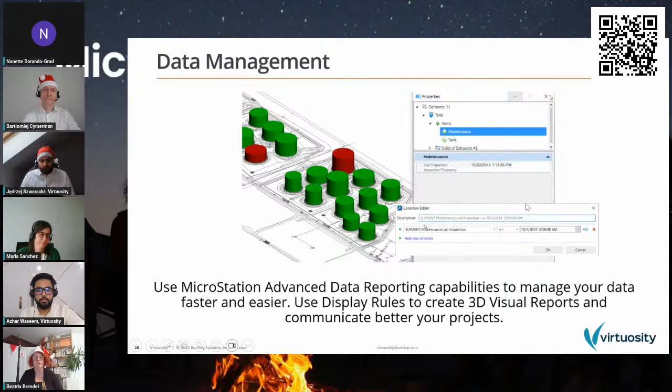Next slide, please, Azhar. This is a video. Is it starting? Yes. You know that it can be difficult to identify how many elements need to be labeled throughout the project.

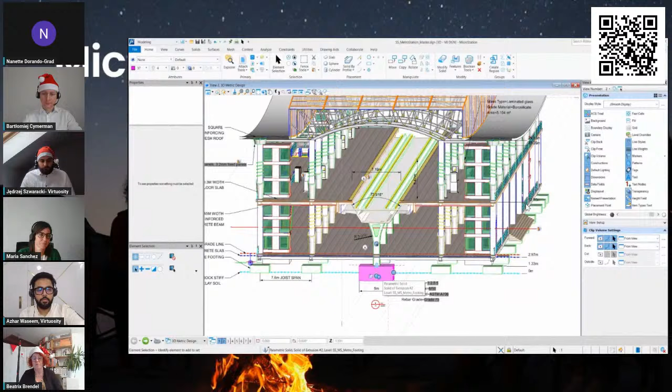To find these elements, we can use display rules. Display rules are a very powerful technology that allows you to spontaneously change the visualization of your data based on element attributes. We want to make this technology easier and more common so that you can use display rules to create deliverables.

These elements can be manipulated from any view of the model, even from a section view. In this case, we will change one of the main foundation elements directly from one of the views, as you can see in the video.

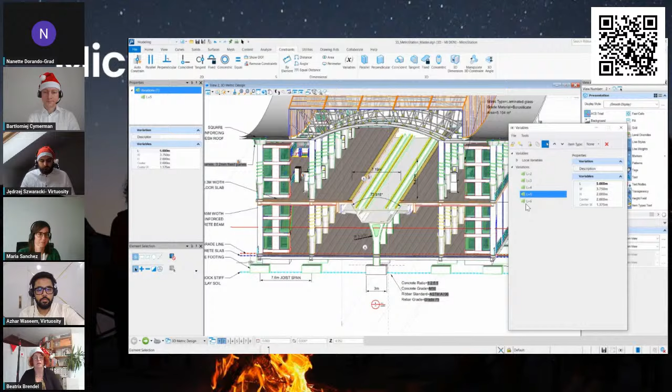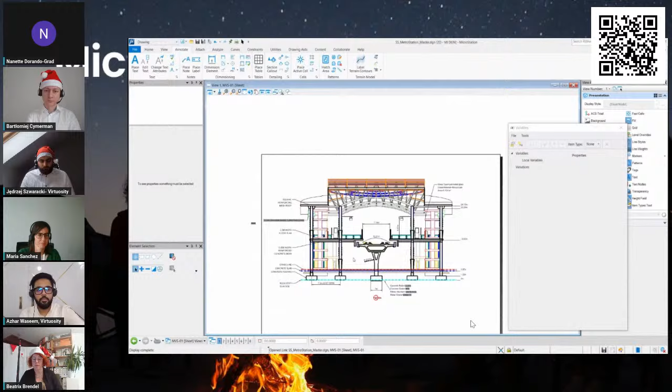There are several variables that can influence the geometry of the elements, as you can see in the variables dialog. There are several variations that define a new value for all variables used in the component creation. You only need to select one of the variations and click apply to see how the entire element is updated in the 3D model and 2D drawings.

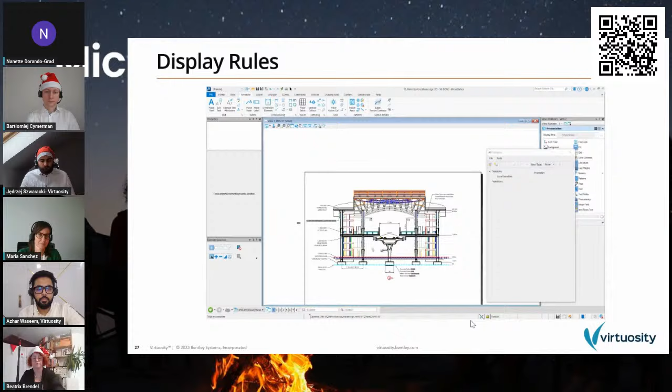With these tools, you don't have to worry about outdated drawings, as they are updated automatically. Next slide, please.

How many different formats do you need to combine in your project? Combinability and compatibility play a very important role in today's world of many different file formats. MicroStation supports many industry standards as well as many proprietary formats for the consolidation of graphics and data, and the exchange with other BIM and CAD products.

MicroStation not only supports and integrates various file formats, but also streamlines the process of consolidating those files to produce your final deliverables. With MicroStation, you can integrate point cloud data without conversions, and it supports several file formats natively in the product, allowing you to focus on your design.

Over to Maria. Next slide, please. Thank you, Beatrix. So, as Beatrix has said, MicroStation supports a lot of formats, more than 70 different formats. We are going to explain a little bit about some common formats like GIS formats, IFC, and how MicroStation uses reality meshes and point clouds.

An interesting feature that MicroStation provides is the option to directly use iTwin Capture data and accurately represent as-built conditions. We can import directly the 3D mesh, as we have here, design an element, and check the clashes, for example. Next one, please, Azhar.

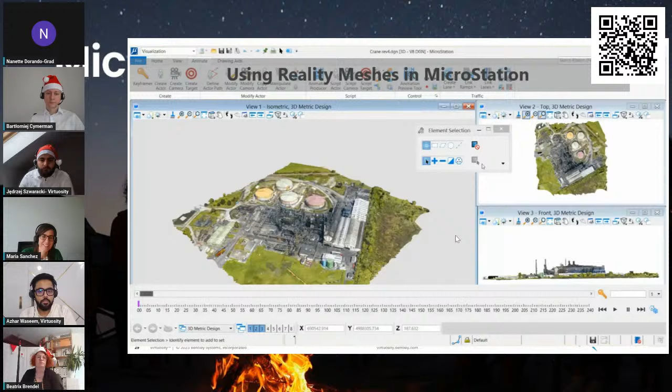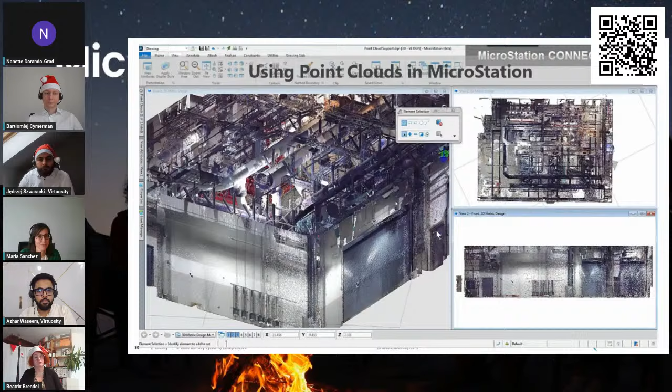In addition to reality meshes, MicroStation allows you to work with point clouds of any size. In our first session last week, we had some great examples like the yacht that Bartek showed us related to the naval campaign. With MicroStation, you can also create geometry directly based on the point cloud information. Next one, please, Azhar.

One of the file formats that MicroStation can open, import, and reference is IFC. IFC is a very popular format to share information between BIM software for multidisciplinary coordination as well as for 3D review. Although MicroStation is a CAD software, it is able to read IFC data, and the user can visualize the model totally or partially. Next, please.

Yeah, Mari, before we proceed further, just a quick add-on to the IFC file format. The Industry Foundation Class format was introduced because a lot of people get confused thinking BIM is technically a product-based output, which is not true. That's the whole reason IFC was brought into place, because IFC is platform neutral — you can generate IFC files that can be opened by multiple software. So BIM is not a software, it's actually a whole process you use to design, and the level of information gives you the different types of BIM models you need. This is good general information for all the newcomers attending this session.

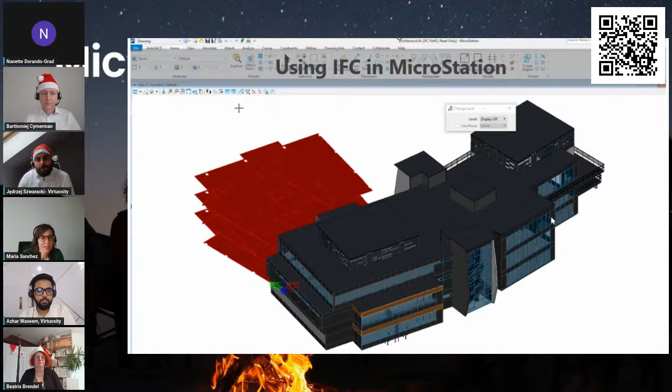So with IFC, all the information included in the objects can be queried via Project Explorer, having all the elements categorized by IFC entity. Next one, please.

Using Project Explorer, we can choose several options like isolate a specific element, zoom to an element, show it in transparent mode. We can also highlight an element's position into the whole model and review all the properties associated to any of these elements.

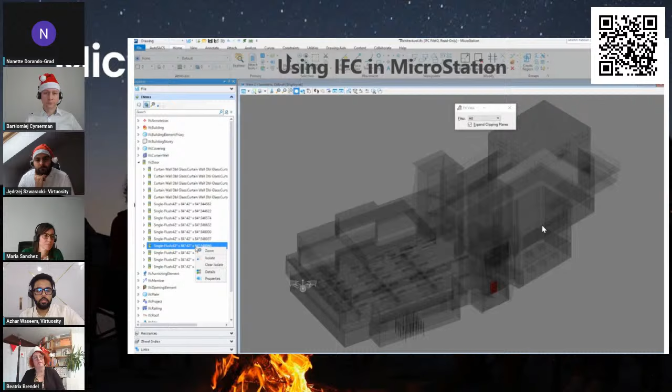This was also a great example in our first session, what Bartek showed us there. Next, please, Cesar.

Now is the time for GIS data. GIS data comes in different formats, and one of the most used is Esri shape files. MicroStation can directly reference these files coming from Esri software and apply a symbology template to any of these files, so it's very easy to identify different kinds of data like lakes, roads, and parks, as you can see here on the slide.

The data attached to any of these entities and elements can be reviewed by selecting the element via Project Explorer. And if you need to review the properties for a big selection group, the details dialog will show you all the data in a matrix format.

I left this format to the end because in MicroStation 2023 there is something new related to this topic: MicroStation version 2023 connects with raster and GIS services directly from the Esri servers. We are going to see it in the next slide.

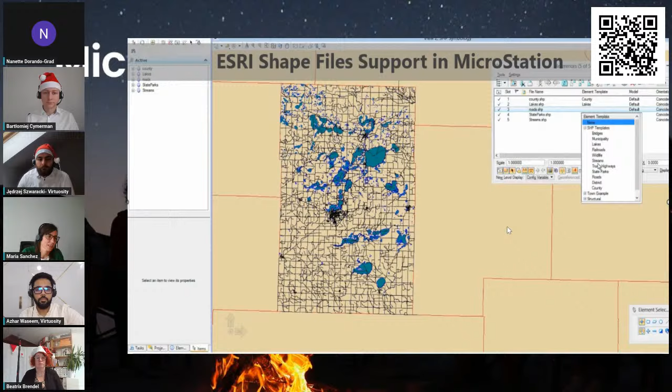With the new version of MicroStation, you can use the geospatial context workflow, which provides direct access to Esri ArcGIS feature services and Esri ArcGIS map and image services.

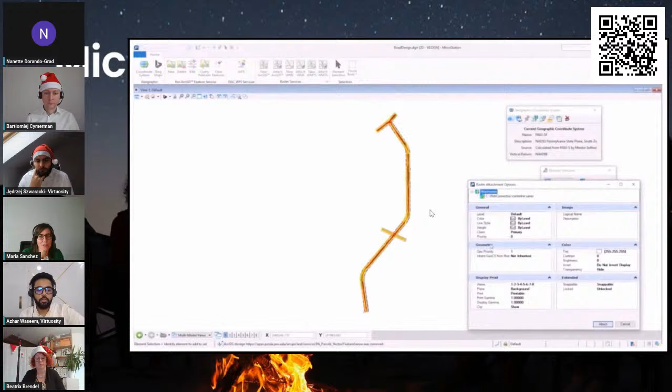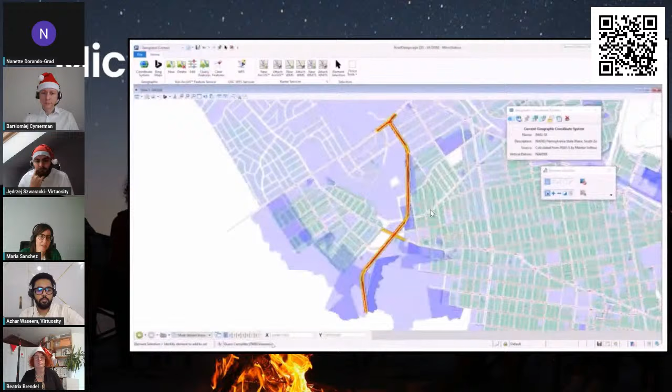The data displayed uses Raster Manager, MicroStation's Imaging Engine. By connecting to the Esri ArcGIS feature service, users can query features and create a DGN representation of the features in the active model, as you can see here.

Feature attributes are also queried and saved as item types on the DGN elements. This geospatial enhancement will help you save time, improve visualization, deliver better geospatial integration, and improve collaboration, leading to a more accurate, efficient, and profitable project.

It's worth adding at this point that in MicroStation 2023 you can use Bing Maps in the background in order to access capabilities like synchronizing and following the Google Earth view, capturing Google Earth images, and playing camera animation in Google Earth.

One more thing: when working on such a project, there's always a requirement to use the existing site conditions to see exactly what terrains are there. One of the major survey data formats provided is the LandXML file, so MicroStation can read LandXML files.

You can see and categorize the terrain based on height, slopes, or even, for example, if there's a lot of bushes and shrubs, you can mark it as green, using different color coding formats to highlight different parts of the terrain on the existing site. That's also a very good feature that MicroStation supports these days.

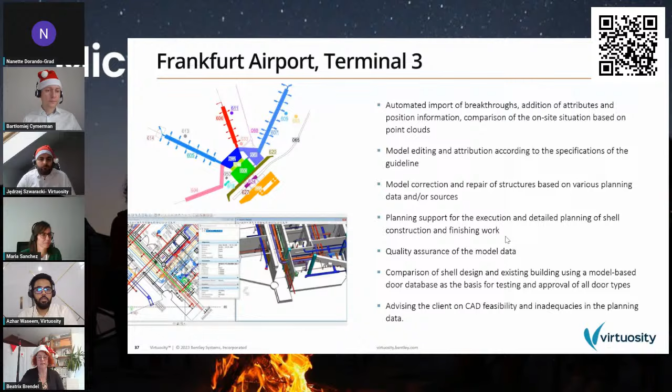Before we proceed further, can I share something? Sure. One of a very good success story here in Middle East was the Abu Dhabi airport. So the consultants and contractors working on the project required to use a lot of parametric modeling on this.

There was a complex structure that required the designers to have the flexibility to design the whole structure. So what happened was the existing CAD software they were working on was completely scrapped, and MicroStation OpenBuildings Designer was used instead. That's actually a very good success story, available on our website, people can have a look at it. In majority of cases, MicroStation has good capabilities in terms of releasing your creativity onto the actual design. Read that, it will help you understand exactly what challenges were addressed using MicroStation OBD and how it benefited the company. I don't want to name the company right now, but we'll share the success story later.

Speaking about airports, it made me think of the Sydney airport, where there's a digital twin that Bentley has been working on. We have to say that MicroStation can be like the bridge to go to the digital twin with the iTwin service. We'll speak exactly about that in the next session. And Azhar, you mentioned OBD - the Abu Dhabi airport is made with MicroStation, right? Yeah, both products were used, the BIM product and the CAD product.

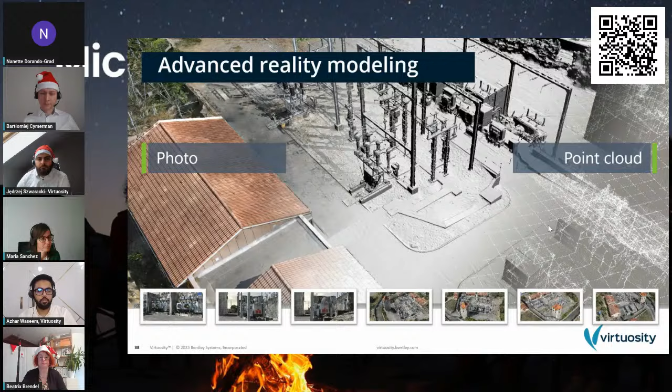There is built-in geo coordination, so you can easily place your BIM model on the ground and even interact with other applications like Google Earth, find files spatially in real-world context, and choose from hundreds of coordinate systems. You can export your model to Google Earth or import Google Earth into MicroStation. I think we already talked about that. And also with the new capabilities, MicroStation 2023 can use Bing maps as well, so that's what we said already.

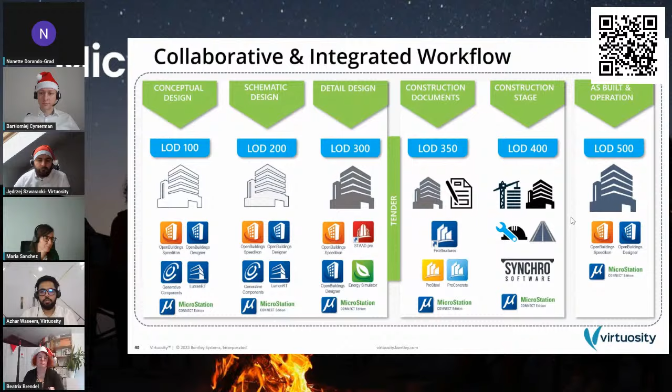Coming back to the MicroStation data integrator part, we'll be covering this in the next session in detail. But as we've discussed over the last two sessions, MicroStation has always been acting as a major data integrator tool, bringing in and working with different file formats, to collaborate and work with different data that you get. So stay tuned for the next session - we'll be discussing this in much more detail.

So if Nanette is available, she said she could be joining for the last few slides, but I don't think she can. Not sure. Yeah, I think her connection is still not stable. So okay, I don't know if you can hear me. Yes, we can hear you. Perfect. So it might be that my connection breaks up again. I don't know what's happening this morning. It's very unstable today. No idea. Thanks Azhar for covering me today.